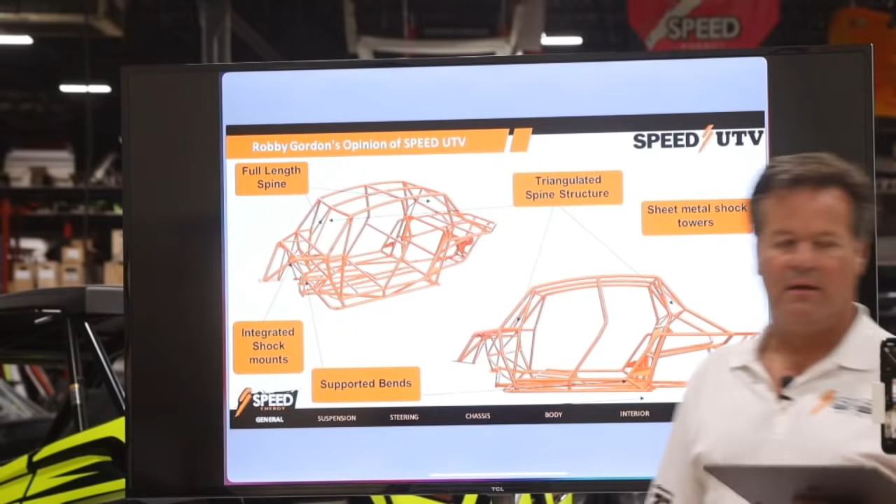one thing I know, when we decided we were going to enter the market as a Speed UTV and we were going to put our name on it as a manufacturer, not design it for somebody else, I was going to build you guys the best car in the industry, and we were going to set the new standard. Something kind of interesting, everybody said, well, every year I got to buy a new car to keep up with the Joneses.

Got to be honest, with this car here, I look at this build being very similar to what we did with the Riviera truck. A lot of people look at the Riviera truck and say, oh, that's the Riviera truck. Well, that Riviera truck was built in 1993. It qualified on the pole for the Baja 1000 3 years ago. It's 27 years old today, and it's still a very, very competitive trophy truck.

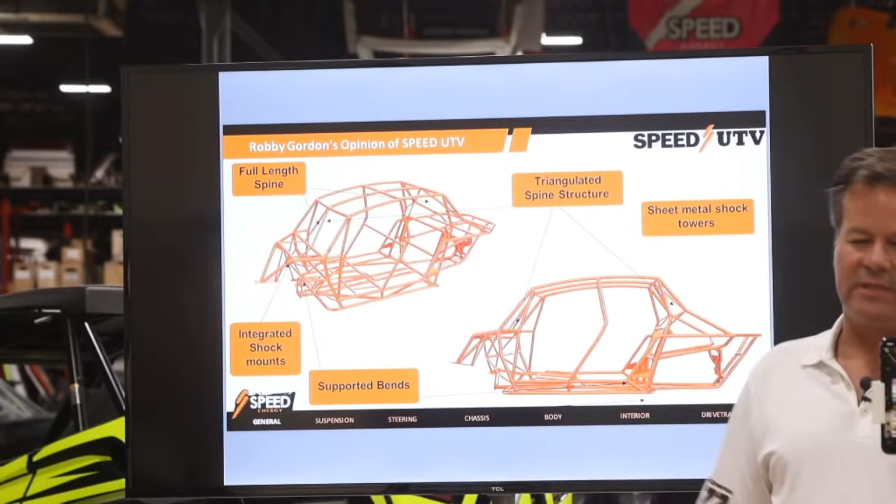One thing we're doing with the Speed UTV is we started at trophy truck or Dakar Premier level, and we're working our way down to UTVs. If you look at the other manufacturers, they started with two-wheelers, three-wheelers, quads, and they're working their way up to a UTV. Obviously, the Polaris has been around for a while, the Can-Am's been around for a while, but when I start showing you the Polaris bare chassis and the Can-Am bare chassis versus what we're building for the Speed UTV, you guys are going to be pleasantly surprised.

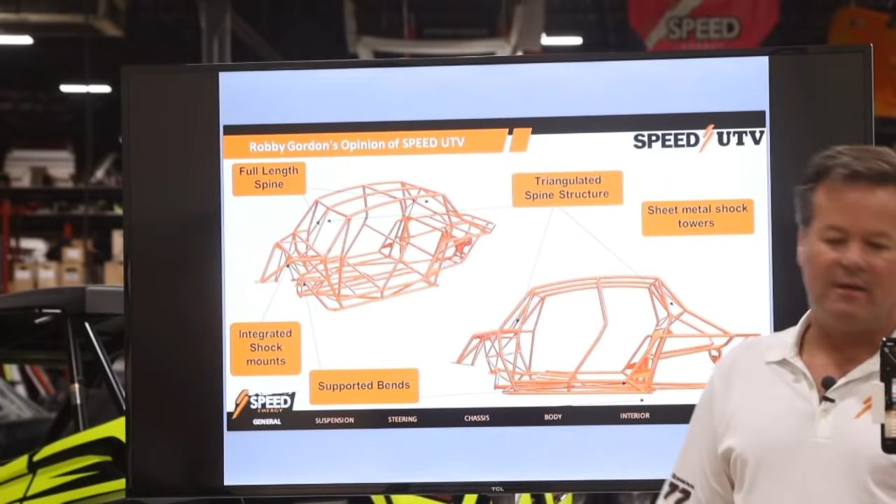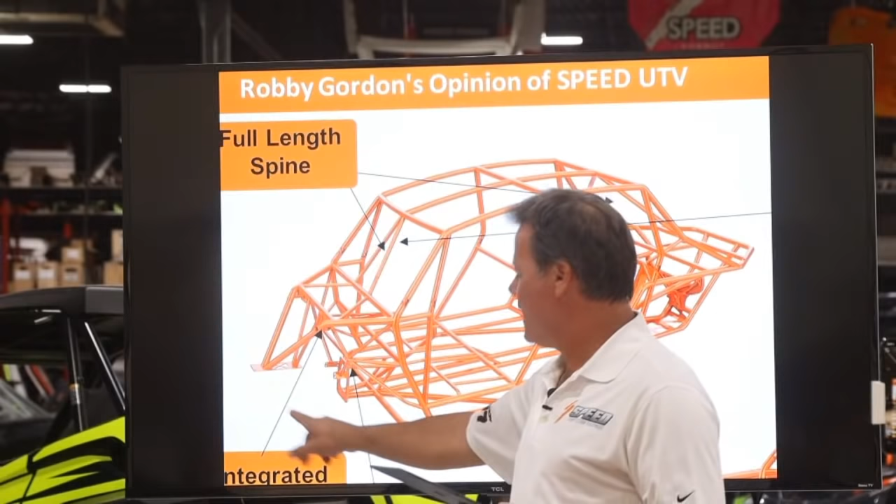So when you guys ask me about weight, yes, we're going to weigh a little bit more, but what I'm going to do is build the strongest, most structurally designed car in the industry. I want to talk about the full-length spine. One more time, I want to explain how that works. So we've got the billet bulkhead down here that holds all the front suspension geometry, steering rack, and the front differential and locking mechanism.

We've got a nice plate that registers into the top of the cases. From here, we run up to this bar here, which takes us over to the A-post and takes us to these. A lot of people think they're intrusion bars. They're not intrusion bars on this car. Would they help with an intrusion? Yes. But what this does, if you look, we connect here, here, and here, and then we go down the middle. I think we're the only UTV with a spine in it.

I might be a little bit wrong when I get to the Can-Am page, but what we do here is we slide down over here and we come all the way to the back corner. But we also support the shocks. We come down off of here, hit this triangle, get over here to the shock mounts. There's another one that splits off this side. It connects it all down together. We basically have a spine through the top of the chassis that really ties the left front shock to the right rear shock, the left rear shock to the right front. We've really got the car connected left and right, structurally sound, which will also protect us in a crash.

One thing, if you were to have a crash, we are the first car in the UTV industry that has actually put an A-post in here. I call that the FIA bar. We do have that bar in place because of an experience that we've seen this last winter with one of our current cars. So we had to add some support there and make sure that that bar does not cave down into the driver or passenger if you were to have a tumble.

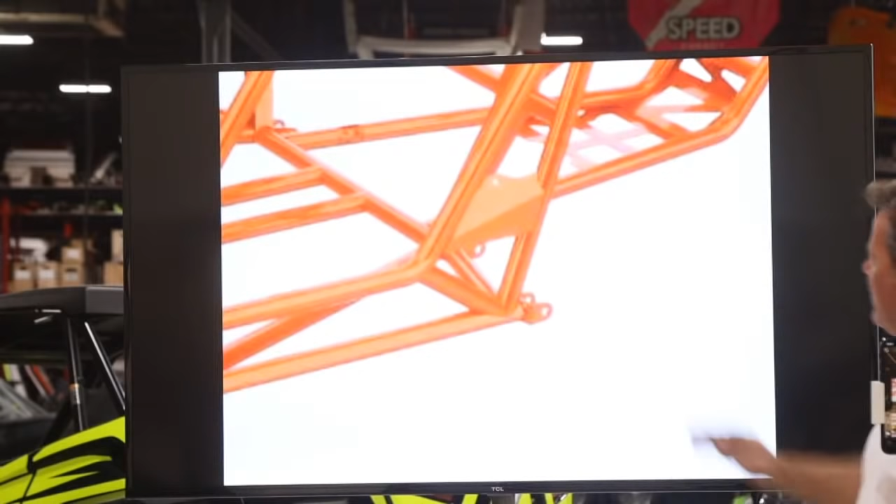If you look at the amount of square inches of weld right here and the way we've connected from the top to the bottom and into this intersection and then off of the motor mount into that intersection, we've really got the chassis tied together right at that outer pivot point. Save that thought as we move forward.

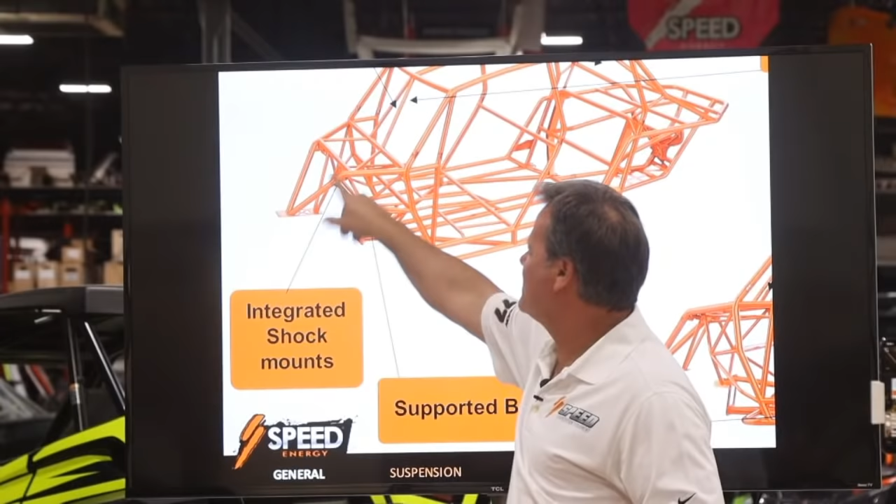Integrated shock mounts. Shock mounts are integrated into this structure, not integrated into a non-supported tube. We support the bends. If you look here, if we have a bend here, we come down off the chassis, we got a bend here, we connect that bend and it gives us structure to support the bend from moving in and out.

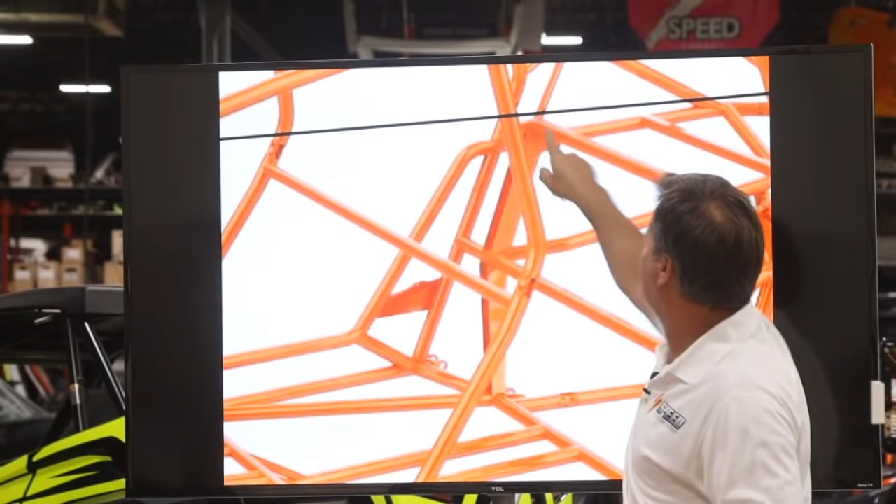And one thing we do want to discuss is on the Speed UTV, we have what we call sheet metal shock towers. And these are .120 wall 4130 shock mounts that go from your inner pivot point all the way up to your shock mount. They tie this intersection together here, here, here. This X comes in here and holds this intersection at the top of the shock mount. Very structurally sound, very strong. Again, save these thoughts. I'll show you some of the cars here right after this.

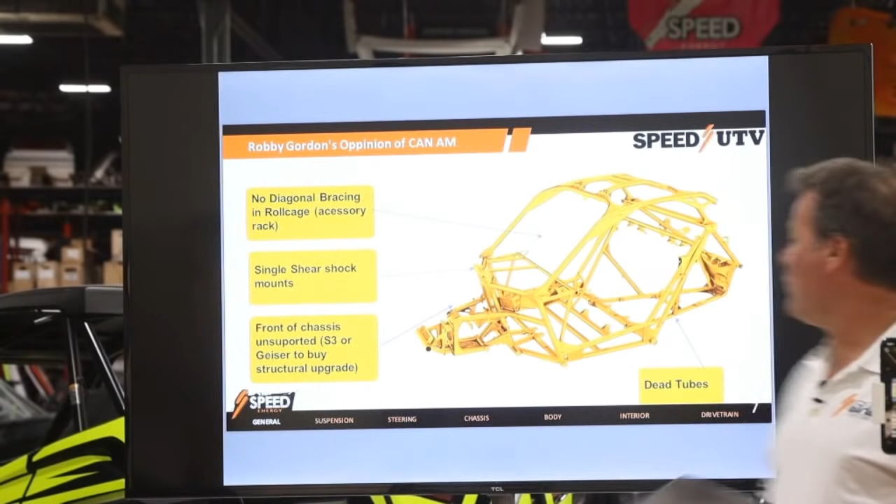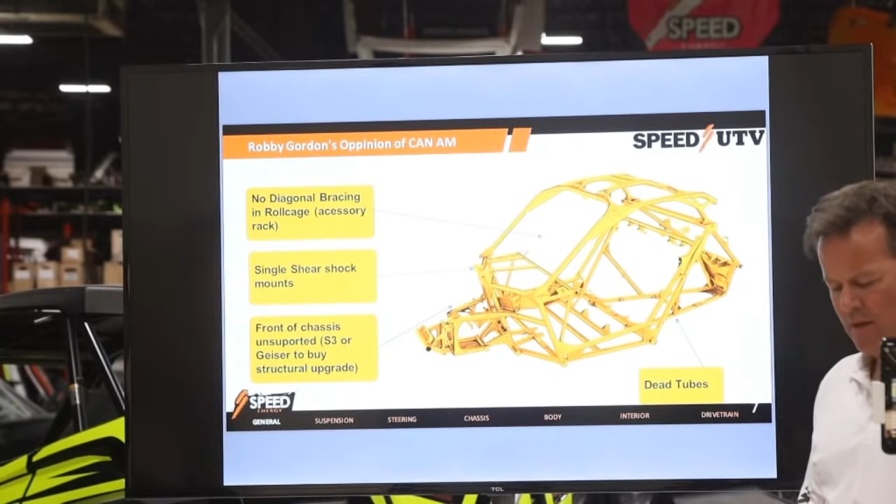All right, now I'm going to roll into the Can-Am. Tonight's discussion of everybody else's car is my opinion, I want to make that clear. This is my opinion based on my experience in off-road racing over the years. Can-Am here is a very interesting chassis. It's definitely interesting, but one thing I want to point out is right here we come right to the beginning with a non-supported tube, where the front diff mounts. No real structure here, not tying any of this stuff together. Single shear shock mounts. There's not even a dual shear shock mount.

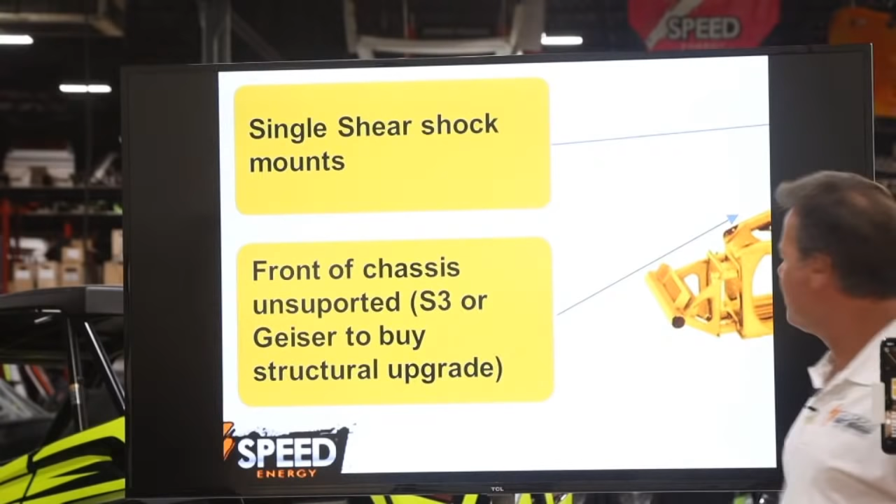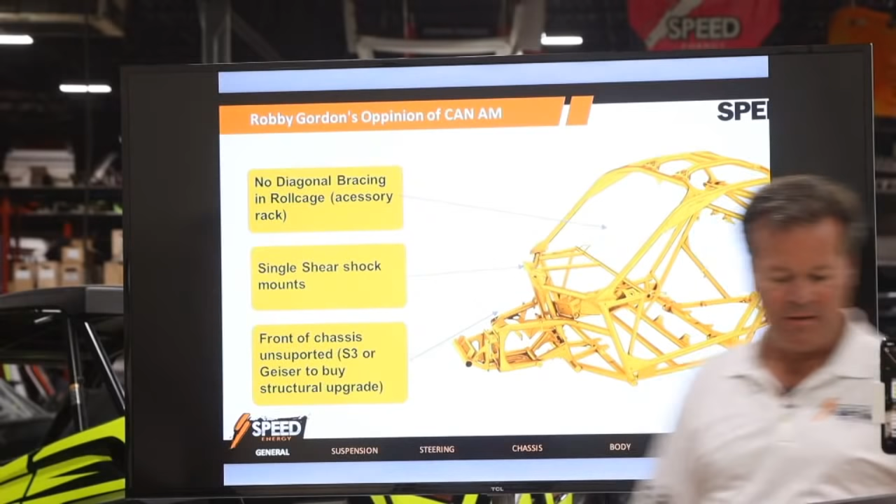What I've been told from a lot of my friends in the industry, you either have to go to Geiser or to S3 and buy a structural front upgrade, because if this thing touches the ground, it junks the chassis. So I know the thing bottoms out into the ground, does not have enough ground clearance at full bump, and it is a little bit structurally unsafe there.

Another thing interesting is these dead tubes, where you look here, you got tubes, you're sitting on a plate here. The Can-Am does have 4 bars across the roof, but there's no X through the roof. So basically it's a bunch of 2x4s standing up. Obviously left-right structure is not there in my opinion.

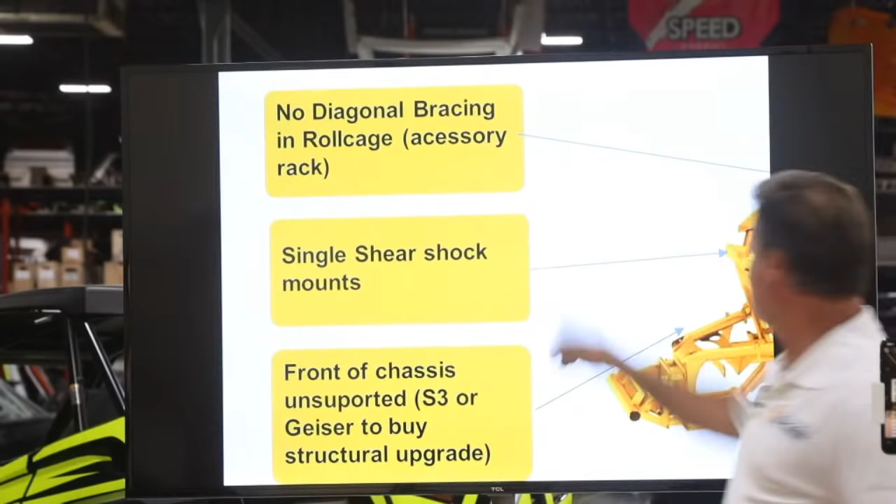This is the Can-Am. I talked about the single shear shock mounts, talked about the unsupported front chassis. You either have to go to the guys over at S3, which make quality parts, or Geiser Performance out of Phoenix, Arizona, is making some wonderful parts. Sean over there does a really nice job.

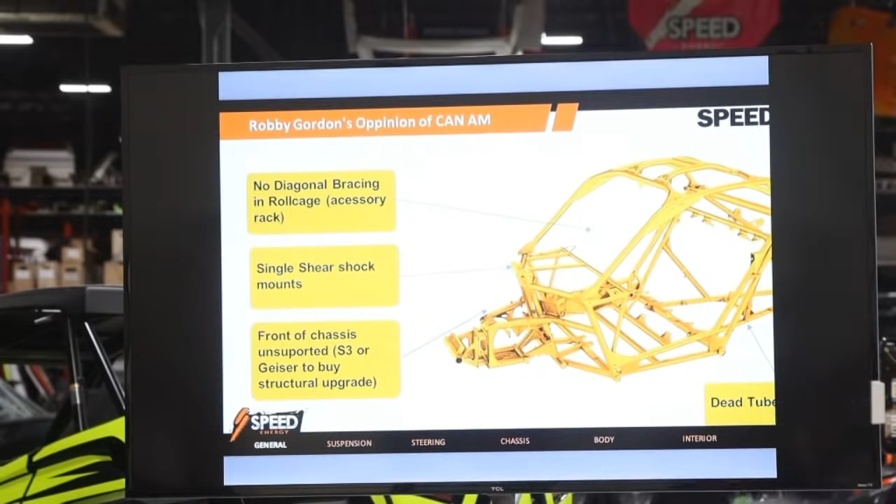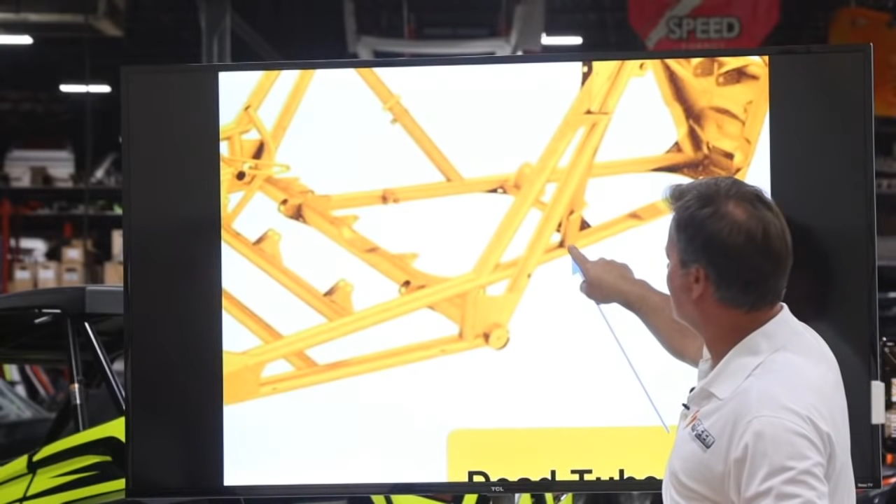So diagonal bracing, no diagonal bracing, and dead tubes. We get back to that same thing again. We've got a tube here tied to the shock mount, but really that tube doesn't go to anything. It's just sitting here in the middle of the tube. You see it, same tube sitting over here. It's definitely questionable.

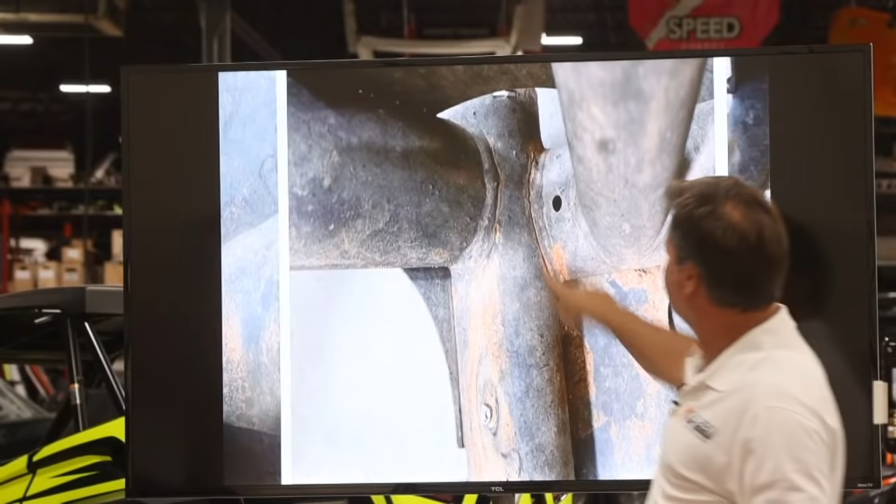Now you say, okay, why does that matter? What I've got here is some pictures. I don't know if you guys can see this, but this is a pivot point mount here. It's pretty much all broken out because it wasn't supported there. Here's another mount here. Basically cracked all through that weld, cracked all through this weld. Over here, this is a big problem. Obviously it was supported and refit here once before. You can see the Band-Aid, but then it broke this tube here.

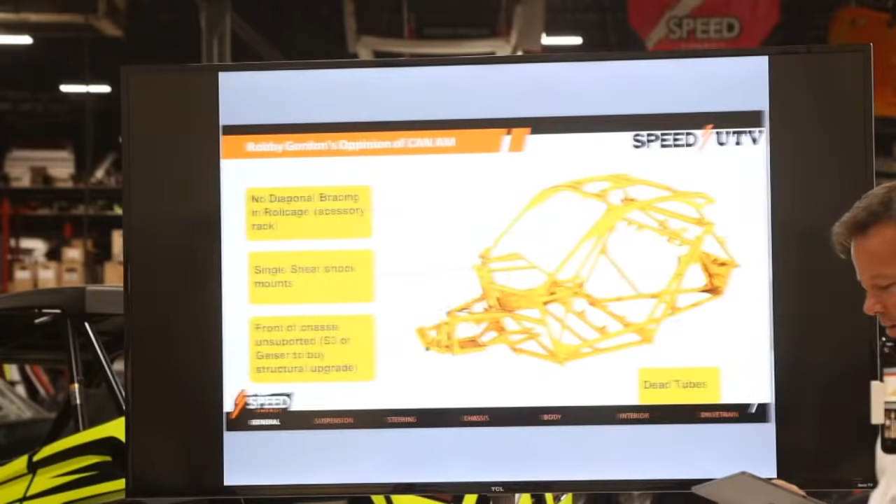You can see over here on this side, same thing over where the sway bar mount is. There's a big broken tube there. Rear chassis, pretty much every weld has some type of a crack. All right, so like I said, this is my opinion of the Can-Am.

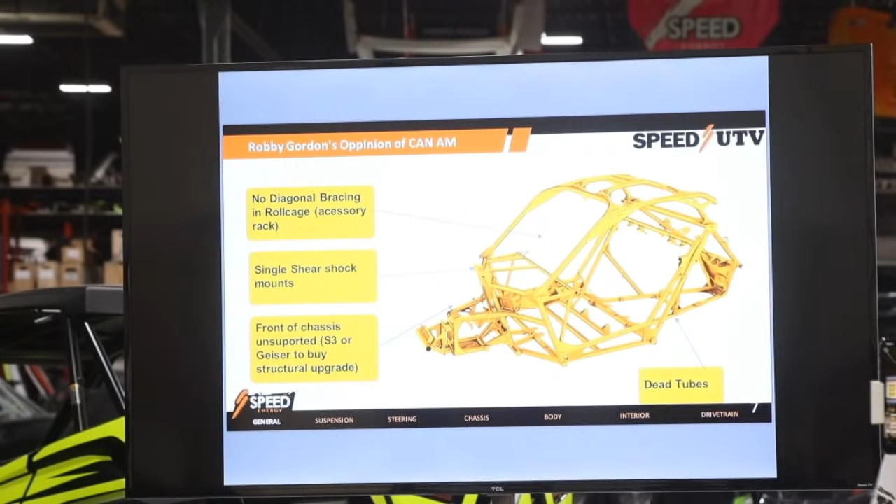As we get ready, and Rob's showing the video to the people over on Facebook and YouTube, we'll start talking about the Polaris. Whoops, wait, hang on a second. There it is, there's the Polaris. I got confused between 2 cars and want to make sure I had the right one. And so Rob's giving me thumbs up. He's looking good over on his side. Like I said, we're bouncing back between those 2 photos here.

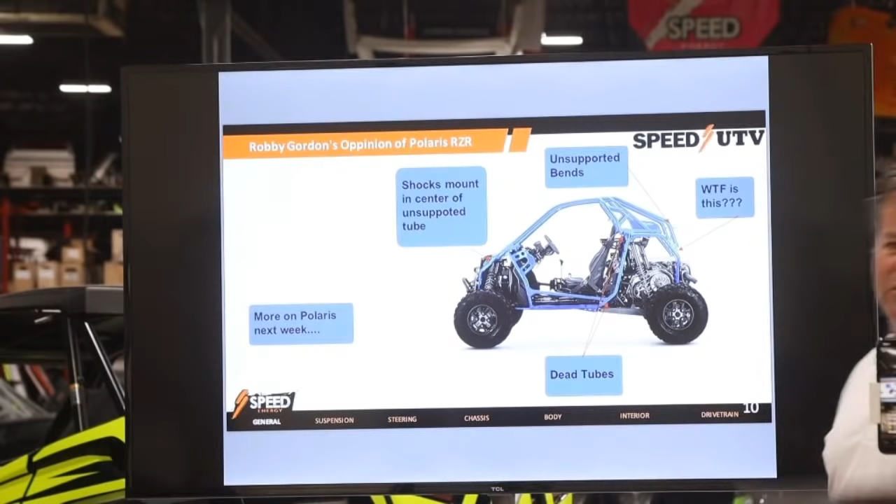I'm looking at the new XP Pro, and this chassis here is very interesting in my opinion. I'm sure it's light, I'm sure it's nimble, but man, it's questionable. It's definitely questionable in my opinion. We ready to roll into this?

Hang on one second. I will get in next week, I will spend more time on the Polaris chassis. I'll get into some structures. We'll do some of the similar stuff that we did with the Can-Am next week, and we'll go through and just dissect a Polaris chassis. Right now, they're looking at the Can-Am sway bar mounts, tubes.

Some of the pictures I showed you, there was actually a full video that was put together. I found it online, and it basically shows where you've got to really check your cars and make sure that if you do take them out and beat them really hard, that you're checking them so the next ride you can go out and you're safe out there when you're riding. So like I said, I'm getting ready to go into the Polaris one over here. I'll wait for this video to end. I can see it on a screen over where they're doing the production.

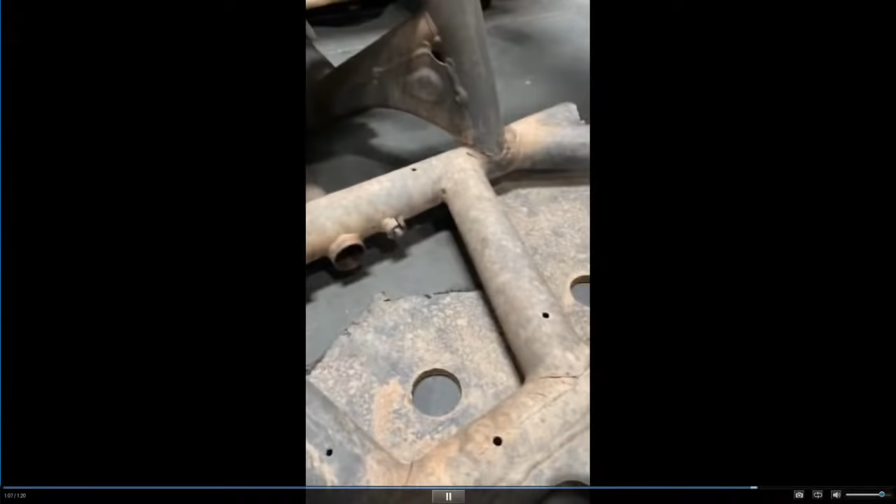I will get into questions at the end. I'm going to answer questions that were emailed to me right after the Polaris. I do want to show you a bit of what my opinion is of the Polaris. And I think they make some very quality vehicles, and they're as fast as these UTVs are going today. I just don't know if I would want to crash one of these things wide open with this style of structured roll cage. Like I said, it's just my opinion.

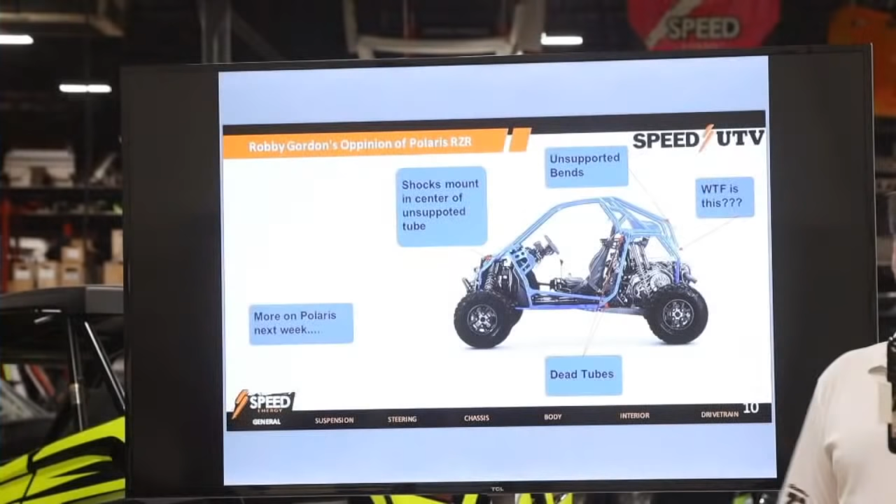You know, I'm out there to obviously teach everybody as much as I can about chassis, suspension, and why you should choose a Speed UTV. Looks like Rob's done over there, so I will get back into the Polaris. This is a car that Corey Geiser had, and it looks just like the new Polaris. As I said, next week I'll really get into Polaris. I'll dissect the Polaris chassis like we did the Can-Am chassis. We'll start showing you some things.

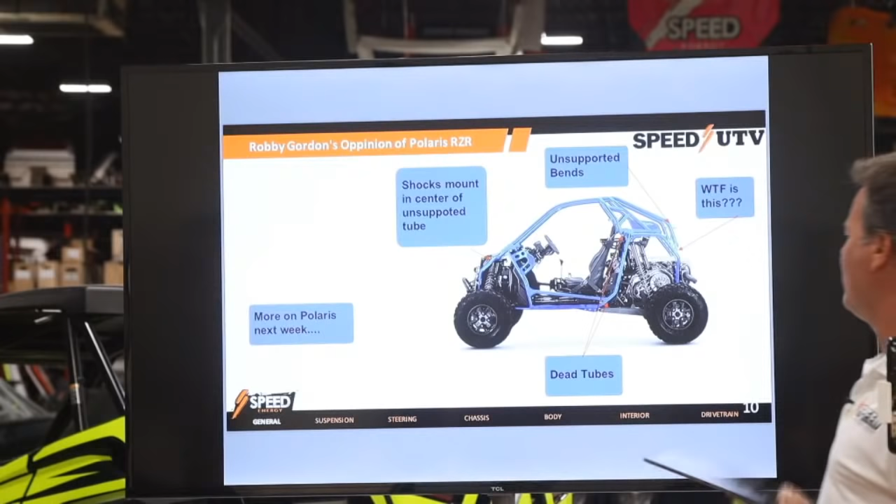Just from a 50,000 foot view for me, the first thing I'm going to go to is the front shock mounts. They're right in the middle of a tube. Shock is pushing this way. These tubes are going to this angle. So I call this an unsupported tube here. Again, we talked about dead tubes.

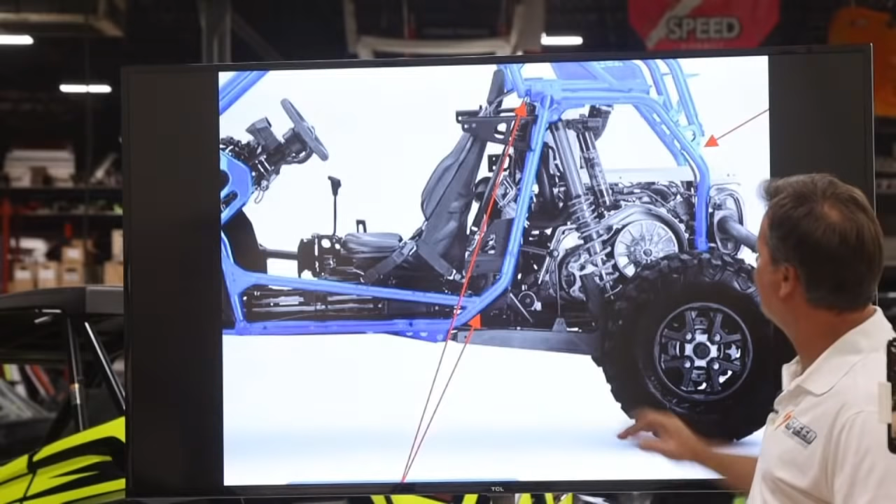As we roll in here, there's a dead tube here, but the one that's even more questionable for me is this is the roll cage. And it's held on with 2 bolts, like a little 90 thou piece of sheet metal, and dead tube, no support. I question that. I know if I was going to go end over end, I just don't think I'd want to do it in this car. As you guys all know, and you're going to rip me up for this, you've seen me crash hard before. That's how you learn, that's how you gain experience, and this is how it allows us to build a chassis and be the best in the business.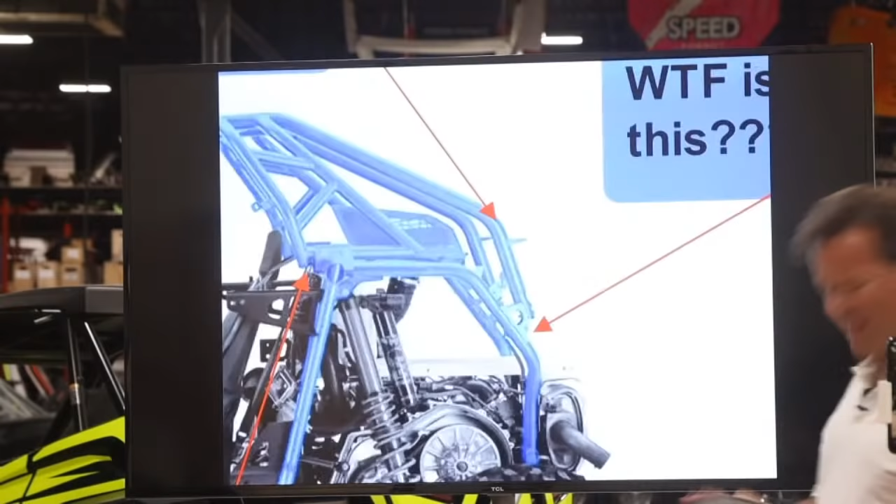Over here, I don't know what WTF means, but this right here is probably the most interesting thing I have ever seen in any fabricated car. Not a race car, just a vehicle. But I've got a roll cage that I'm structurally trying to protect the passengers inside here. And right here, I think it's 90 thou mild steel, HSLA, something like that, with a dimple die hole tacked to another unsupported tube.

Like I said, I will get into Polaris next week. I'll show you more about the Polaris. We'll talk about what people need to do to make them even close to being as good as what a Speed UTV would be on the chassis suspension side. But when you look at our price for a Speed UTV, just remember there's a lot more tubing in the car, there's a lot more structure in the car, and the cars are actually very, very well thought out.

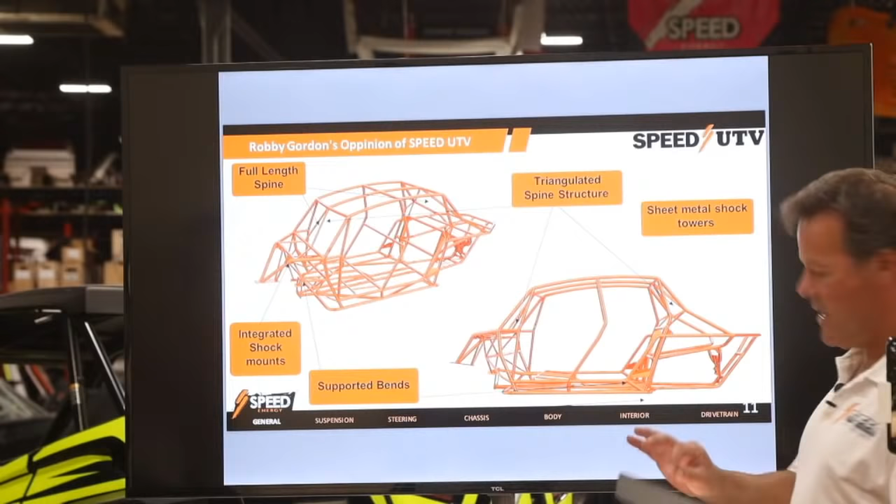So I'll come back here one more time now that I've showed you the Polaris and the Can-Am, and we'll get into the chassis one more time. As you see, everything has a triangle. It's basically boxed, protected. There's no dead tubes. Everything is intersected.

Everything meets, comes up, structured, double shear shock mounts, double shear pivot points, shouldered bolts all the way through, 3-speed shiftable gearbox. With the turbo placement at the rear, I believe that we are building the safest, and this is my opinion again, we are building the safest UTV that the industry has ever seen before for a production vehicle.

I want to show you a bit more of the front diff. Obviously, the bulkhead structure on the front diff. This is something I did on the Unicorn, something we've been working on for a couple of years. Took us a little while to figure it out. We wanted to integrate this right into the first UTV that we built at Speed UTV, because this is the right way to tie the front end together.

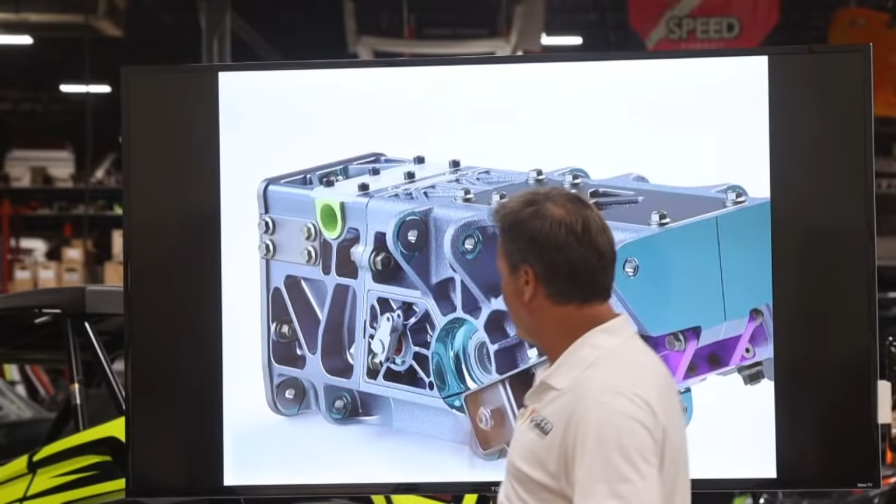As you guys weld metal and it pulls and it moves around, when we do a cast machined bulkhead like this, all the pivot points will be perfectly machined. All the pivots will slide together. You won't have to take pry bars. You won't have to take hammers and pound this thing in. Inside, it has machined bosses that press in so you're not riding your suspension points on aluminum. You've got the hydraulic power steering system integrated.

This is the top mounting plate that you saw in the chassis. I'll go back to the chassis and show you that piece hanging. We've got another structure piece here that supports the sway bar, but also supports some chassis. We've got another chassis support there. And then we have this tongue and groove that runs around the back that the thing plugs into, and it has a register that'll keep it from turning left to right. It's got a small little bulkhead at the back that this thing plugs into that really makes it strong.

I'll go back one more time. These are the side plates that you saw. Those are where the side plates tie in. This is where the front plates tie in. It's got 4 tubes coming down. Has a lot of structure, a lot of diagonal. Elbows are out. Really a lot of structure to support the front end from moving left to right.

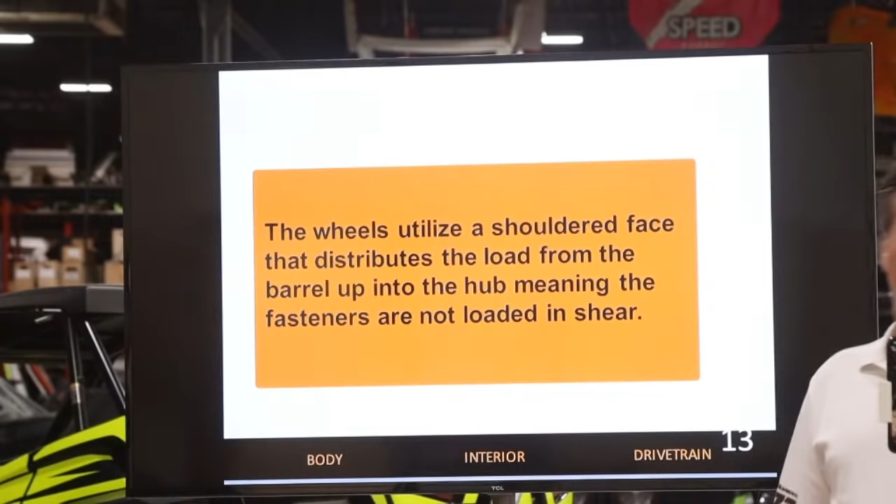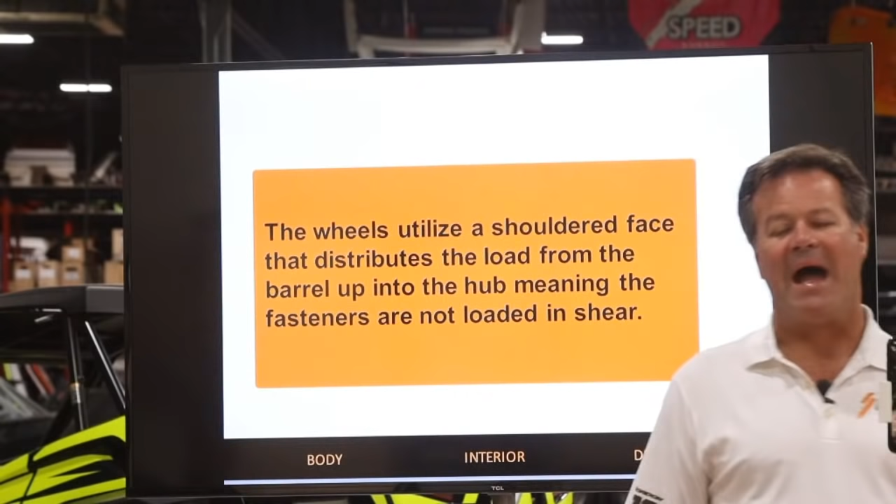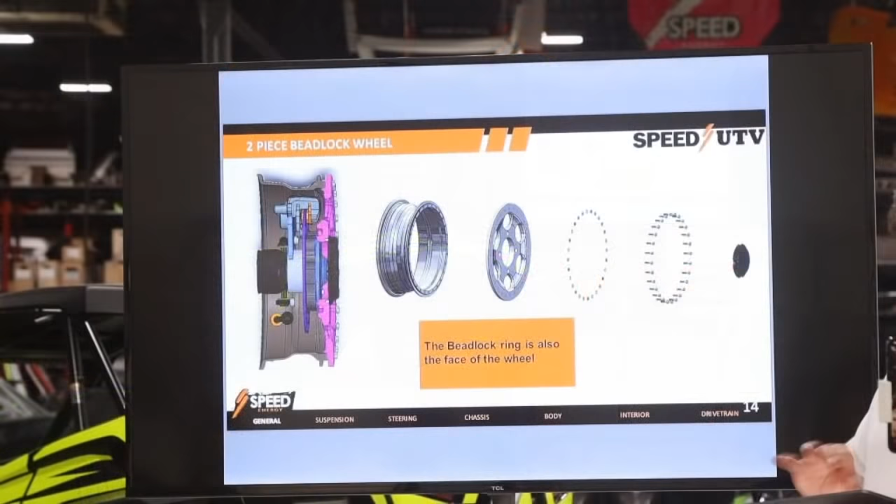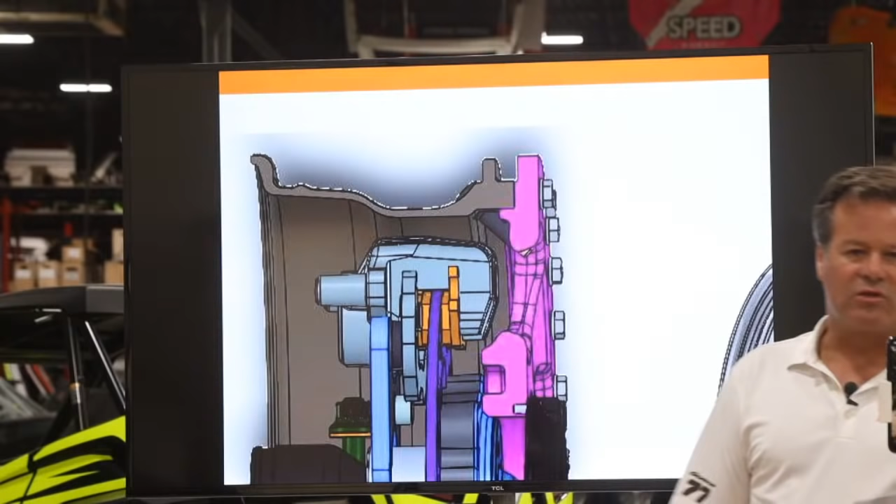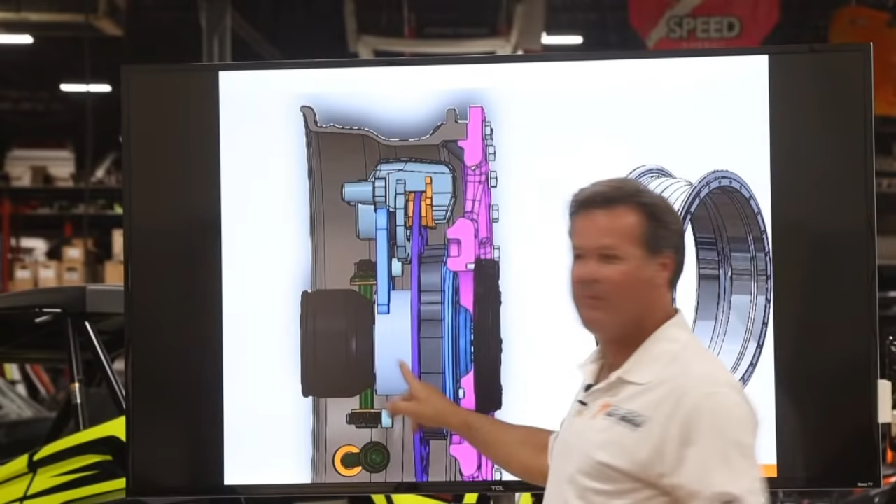So as you see, we have the beadlock face here, which is a wheel face that gives us the best positive offset, which helps us for kingpin inclination, scrub radius, loading the bearings. If you think about it, we've got the bearing down here in the middle of the wheel. If you look where the bearing is right here, we're dead center on the center of the wheel with the bearing. That is the strongest wheel bearing placement we could possibly do.

Imagine if I move that wheel bearing over here like some of the other cars. We're basically trying to rip it out of the wheel bearing all the time. We have swallowed the bearing with the wheel. That's why we had to design our own wheels. We had to really do this with the Unicorn when we started it, and it was such a cool idea. I wanted to incorporate it into our new Speed UTV.

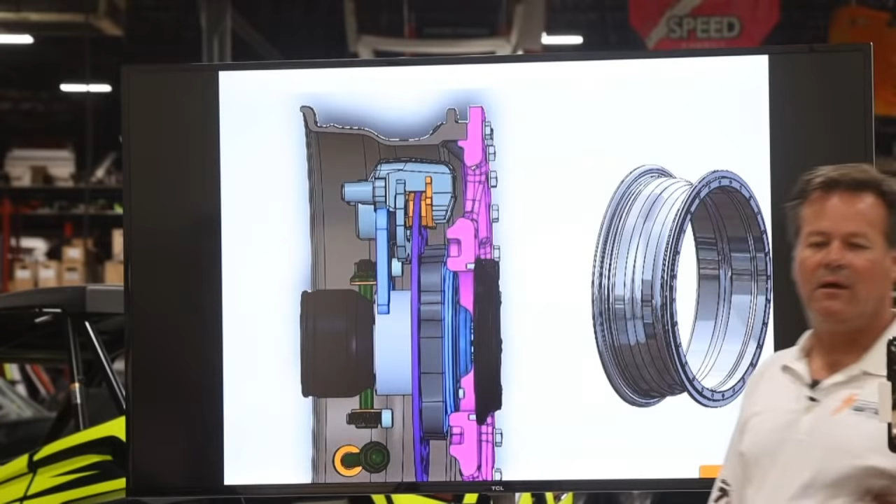So all LE cars, all RG cars come with a two-piece RG beadlock wheel, which is the next generation wheel, which is this wheel here. So you can see the cutaway, you can see the bearing, you can see the brake rotor here. This is the bearing, there's the CV. You can see some steering bolts.

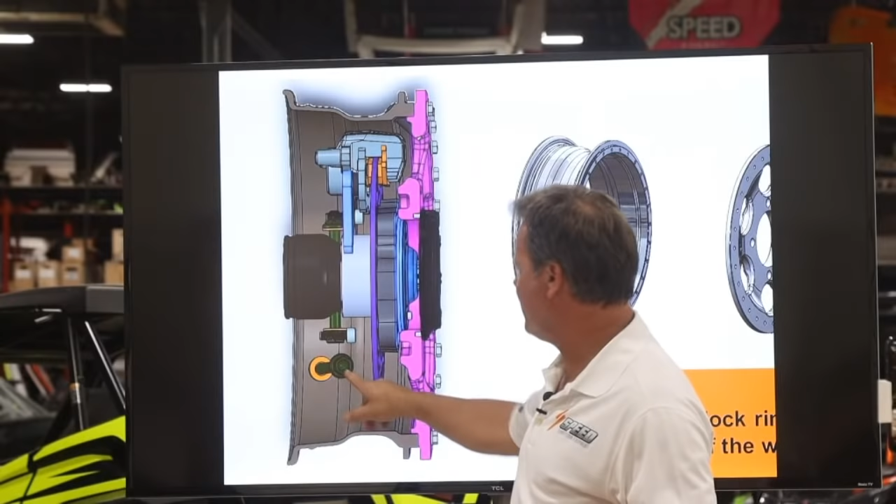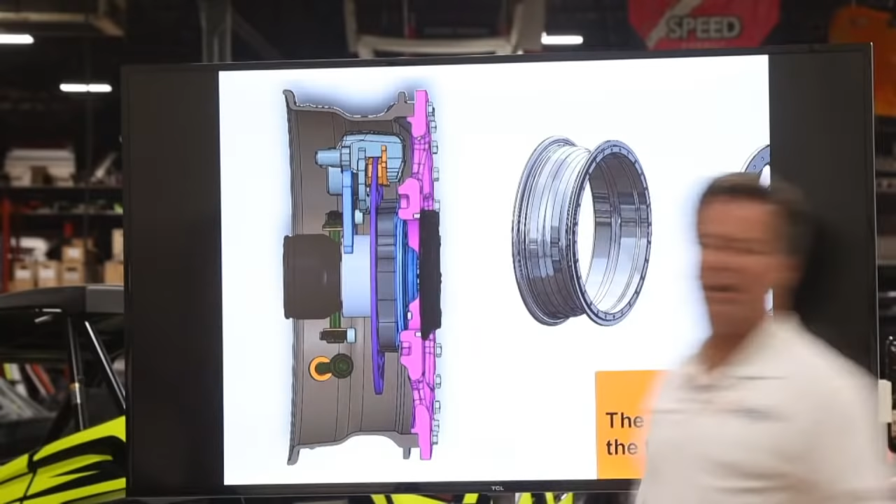If you look where the steering bolt is, think about that. That steering bolt is way inside the wheel. If you look at some of the other cars, they're actually outside the wheel and tire. And right there, that nice little lip, that's a 3/8 load. If we shear these wheels off, we got much bigger problems. You'll probably be picking up your helmet a long ways away from you. It's going to be a big crash.

The wheel, the way it works, sits inside this machined radius. There's a lip inside this wheel, it plugs in. Washers, bolts go on, holds the whole thing in. It's structurally sound. Thanks for your question. It was a good question. Hopefully this will answer the wheel for one of the last times. This will be on Speed UTV's website. You can go back and look at all of our presentations if you haven't seen these.

The next one is Brock Randolph. He said, I noticed some of the drawings have half doors like a Polaris and Can-Am, but the pictures I've seen all have solid doors. Anybody know what we have? The reality is we don't build a half door. If you choose to take your door off your car, that's your choice. But in my opinion, we will be shipping all cars, all times with full doors. Anything less would not be up to my safety standards, all right?

So solid doors, can't get your foot out. If you're tipping over, you won't be able to reach your foot out like you can on a Polaris or Can-Am and think you're gonna save it, because you're probably gonna have a broken femur, broken leg. You might not even have an ankle anymore. I wanna make sure you keep your hands, arms, and feet inside the car at all times. Come on guys, be safe out there. You're not going to be able to use your leg to hold this car up if it's tipping over. It's not physically possible. Cars are way too heavy. Keep your feet inside the cars.

Cool. Yeah, it's good to have you calling tonight. Have you had a UTV before? Do you even know what a UTV is? Yeah, yes, sir. I've been running Yamaha before, and it's pretty fast and fun. But your deal looks pretty quick. Well, thank you, Jesse. You know the Yamaha engine. They make a great engine. We use that Yamaha 3-cylinder in the XX that we did for Textron, and it's been a very, very good engine. It's very lightweight, high performance. Yeah, for sure. I'm a fan of Yamaha. I'm ready to get myself in one of these RG specials for sure.

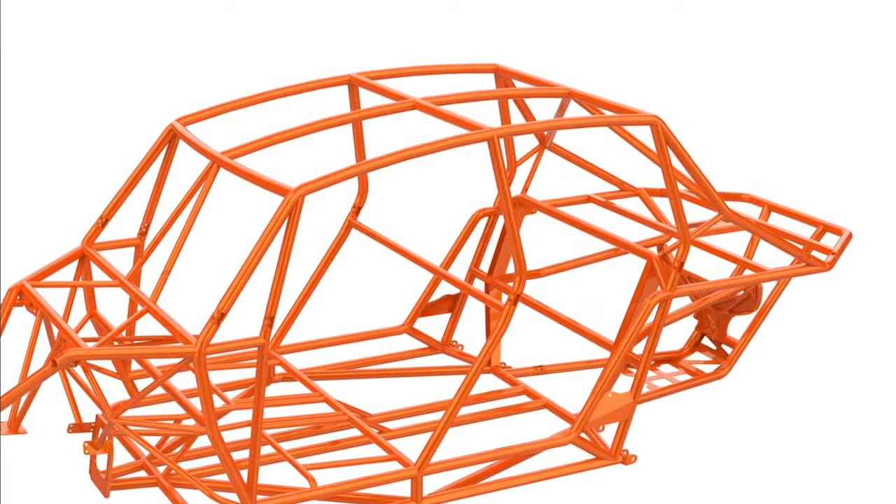Not unless you get the right inspector. Yeah, no, I understand that. You know, obviously our goal is we're building an off-road vehicle here, and we're trying to build something that has a great crossover for the gravel roads and the farmers. If you look at the Speed UTV, it's a performance vehicle, but it's got a bed where you can haul stuff. You can throw some hay bales in the back of it. You can throw some shovels and rakes. Obviously, go out and hit the farm fields during the work week, and still be able to play with your machine on the weekend and the sport side of things.

Yep. Now, what about the cab? Are you going to do any kind of sound deadener, like Dynamat or anything, or carpet? Yeah, our air conditioning cab, like you said, you did order air conditioning. It will have a rubber foam insulation. Obviously, we're going to have to insulate the roof because the roof creates a lot of heat, which would be really hard for the air conditioner to keep up with. But we'll also do the doors, the floorboards, all that stuff. So we will have some sound deadening. We will have some heat resistance.

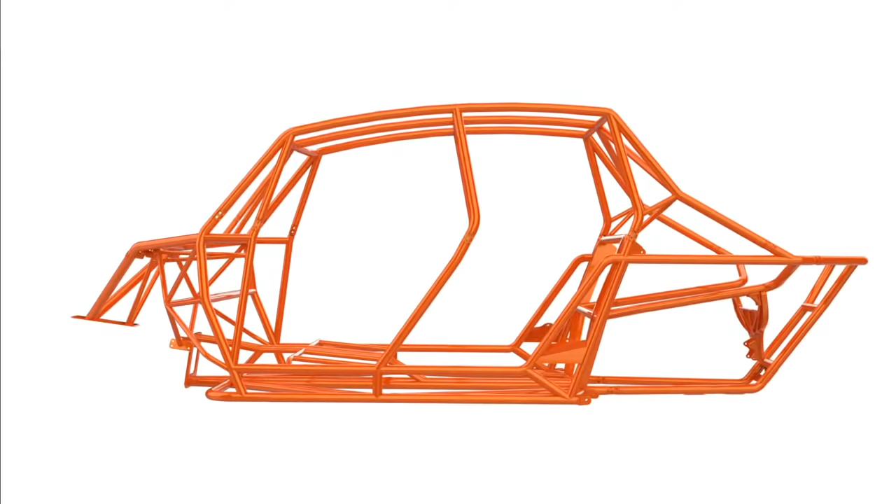It's something that we have looked at. We have one of these kits that we actually put into the XX that we put on the rear firewall, and it makes a big difference. I mean, the firewall with a normal car, you touch it, it's hot. You put this kit on, you can put your hand there, so it'd be a lot easier to cool it and to keep it at the ambient temperature a lot cooler.